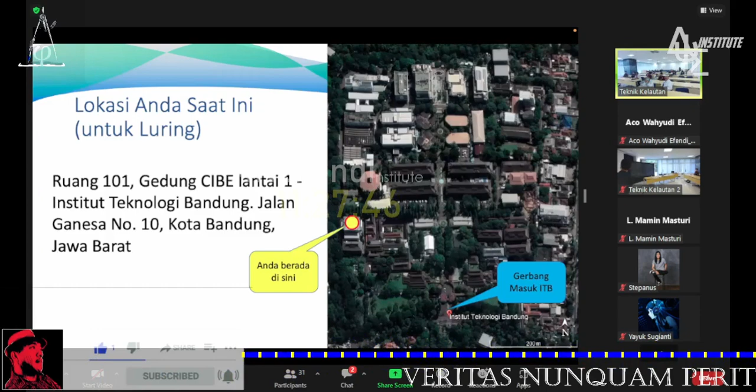Selamat datang untuk semuanya. Untuk para peserta, Anda ada di ruang CIBE kurang lebih, apabila di atas itu ada arah utara, kurang lebih kita ada di posisi barat daya dari area ITB Ganesa. Peringatan juga karena ITB ini berada di lokasi yang dekat gempa, jadi mohon atensinya untuk tindakan terkait dengan gempa.

Jika terjadi gempa bumi, pertama mohon tenang dan jangan panik. Kedua, berlindung di bawah meja atau segitiga kehidupan yang melindungi kepala. Ketiga, jangan berlindung di dekat mesin, kaca, lemari, atau rak material dan produk. Keempat, temukan jalan keluar dan segera meninggalkan gedung saat gempa terjadi. Kelima, jangan menggunakan lift saat terjadi gempa bumi. Dan keenam, berkumpul di assembly point yang telah ditentukan.

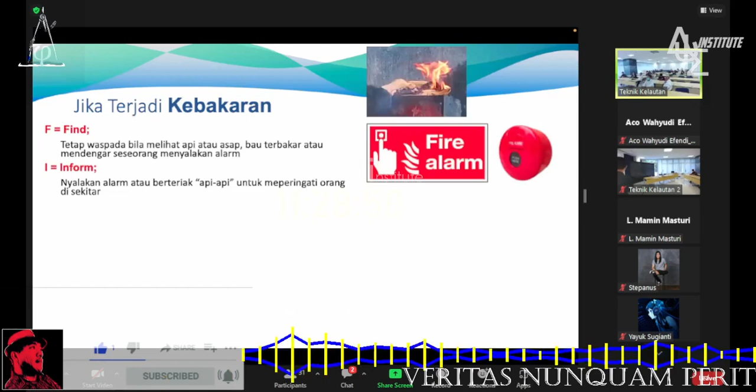Jika terjadi kebakaran, beritahukan kepada orang-orang di sekitar apabila ada bahan-bahan api yang mulai memercik. Selanjutnya, jika mampu, mulai cegah agar api itu tidak menyebar. Ada APAR di luar yang mungkin bisa digunakan apabila aman untuk dilakukan, apabila tidak aman segera menuju ke assembly point atau titik evakuasi.

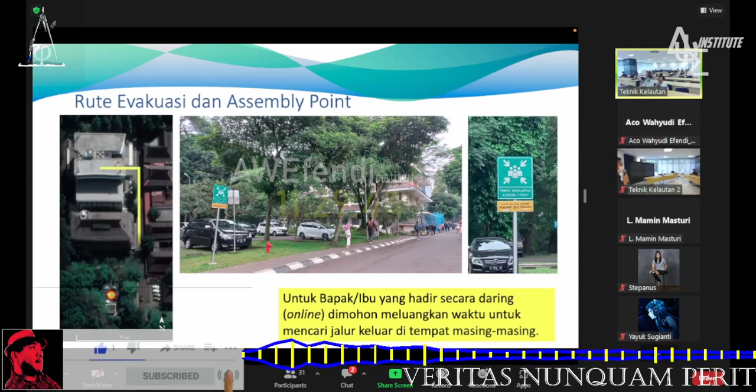Di sebelah selatan itu yang terdekat ada assembly point di titik tersebut. Bapak Ibu bisa keluar langsung dari pintu utama langsung menuju ke arah kanan. Untuk yang hadir secara daring atau online, silakan menyesuaikan di rute evakuasi terdekat. Sekian, terima kasih Pak.

Apabila ada barang jatuh Pak dan tidak ada meja, mungkin bisa bersandar, tapi yang sekiranya itu tidak langsung menuju kepala. Jadi seperti ini ada daerah plafon gitu. Begitu Pak. Terima kasih.

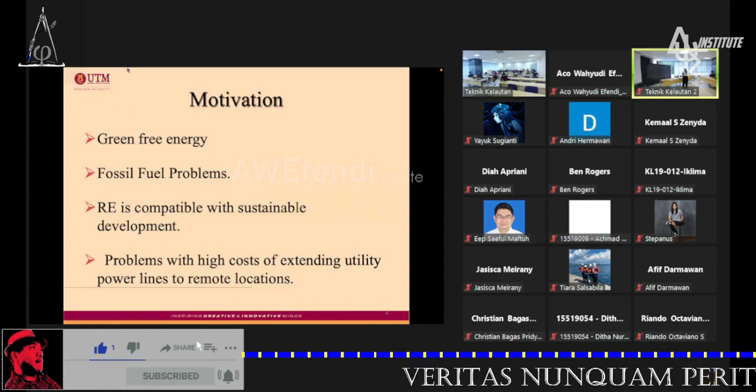Especially like the river, the activity of people in a remote village in the jungle with access only to the river. This is basically an overview of the different energy sources that we can use.

Sun, solar—so there are different possibilities for filling the energy need. But for this presentation, I just focus on the turbine, the tidal current turbine.

So we can have energy, that's great, but the only problem is that in Malaysia the wave is small, you know. So we still have to do some kind of design on how to capture it.

In my presentation, I'll focus more on the tidal current; offshore wind is already a well-established technology.

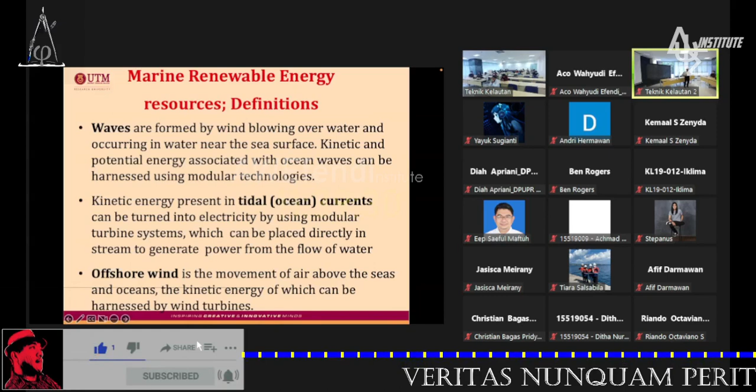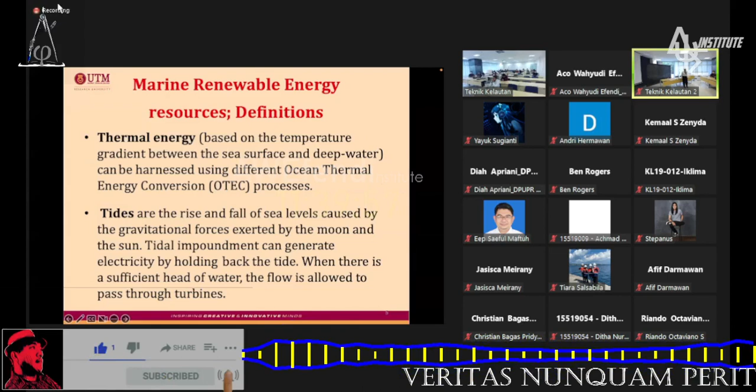So thermal energy, you know, that's always there—tidal range, or osmotic pressure. There are different scales for it, marine biomass using seaweed and so on. A lot of alternatives.

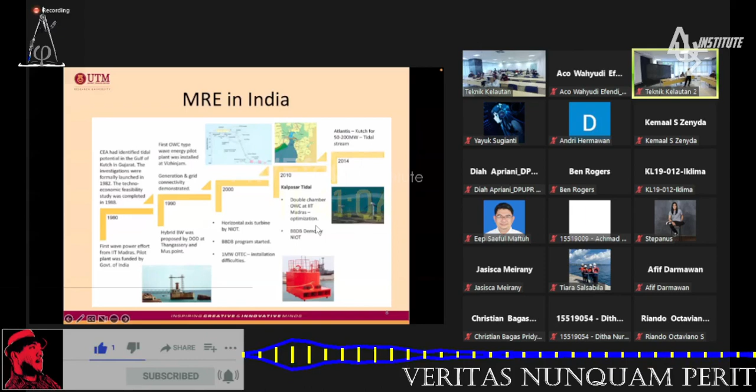Okay, so this is from India, using tidal current.

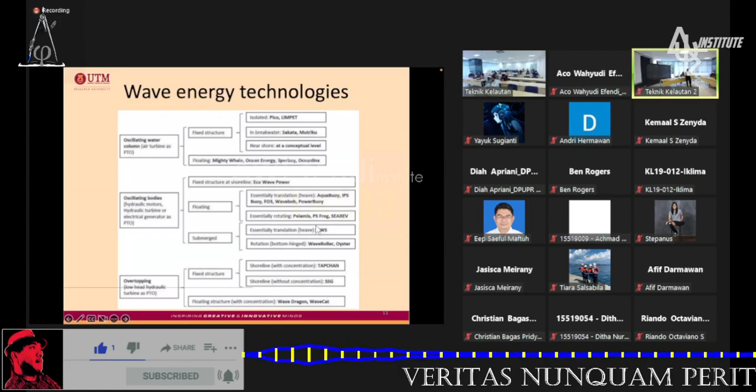So you can see, for example in the wave channel, you have it working with the current. So it means that if we can design a device that can oscillate, then we can tap into the energy.

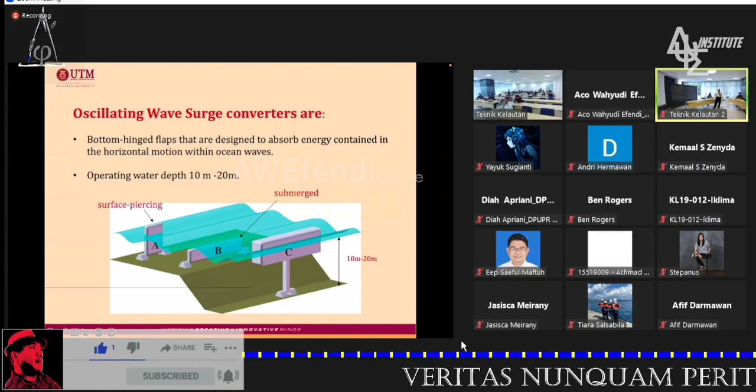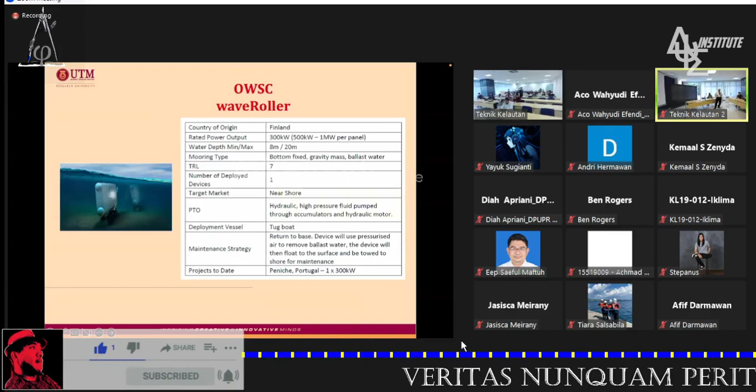So there's a lot of these devices. This is one of them, using the flap—the wave roller. Okay, next one.

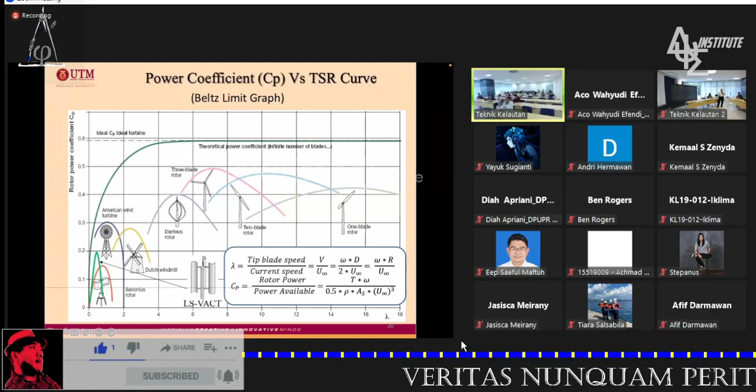Okay. And you can see that nowadays the current turbine seems to be in the commercial scale already. Okay, these are the different current turbines, and mostly you see most of them are propeller type. That means they need significant current speed to be able to be commercially viable. Usually it should be about 2 meters per second. Okay.

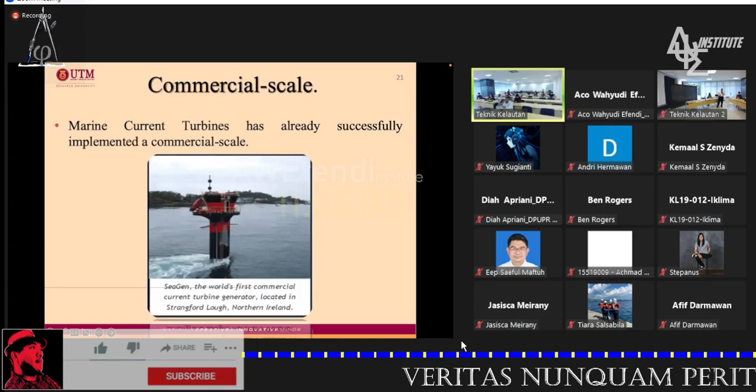So we are now focused more on the hydrokinetic turbine. So there are basically two types: the axial flow and the cross flow. The axial flow is basically for the horizontal axis turbine using the propeller. And for our case, for the low speed one, usually using the vertical axis current turbine or the cross flow type. So you can see all these types of turbine. Last time I saw Indonesia used the Gorlov turbine.

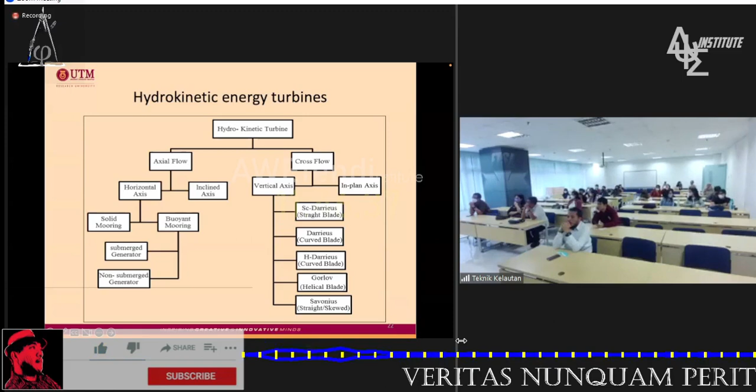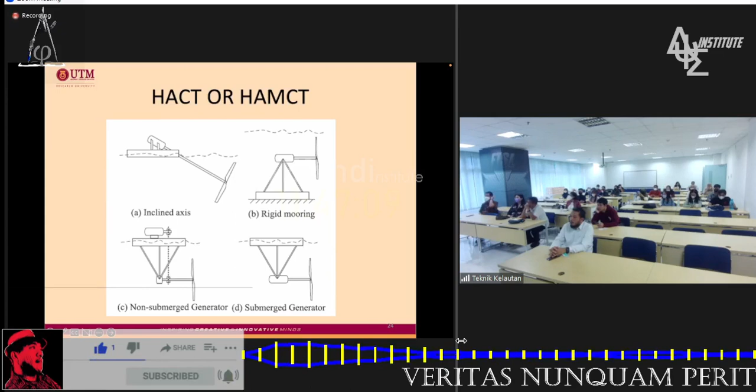Okay, next. So this is the picture of the different vertical axis current turbines we focus on this morning. So we have this Savonius, Gorlov, Darrieus, H-Darrieus. Okay. So this is the horizontal one, which we are not focusing on today because they're mostly using propellers. This is more for higher current speed. Next.

But since the current is very low, we have a problem with the torque. The torque is needed to turn the generator. So it's better to start off with a higher torque, and then you put the gearing to increase the speed. Because at the end of the day, you need to turn the generator. No point to have the blade turn very fast if it doesn't have enough torque. You wouldn't be able to turn the generator. So that's the idea that we have. So it's like a cross between Savonius and Gorlov.

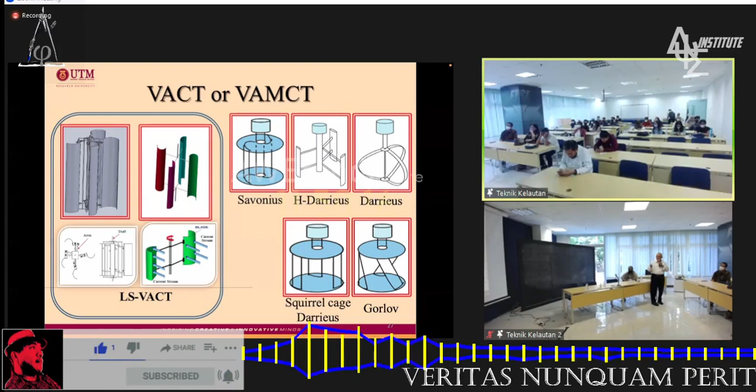So with this type of blade, the angle can change. Say this one, the blade will open to get the drag. Okay, and then it's joined using a link. There's a link here so that when the blade opens, this one closes. But the disadvantage of this type of blade is that it's hard to implement. So now our initial try, we just use the simple one.

Okay. What's the objective of this project? The first objective is to build and evaluate a small prototype marine current electric system for low current regions and also for rural areas. Rural areas find it very hard to get the power. And then also to develop a simulation program to basically check the size of turbine that is suitable that we can build. Okay.

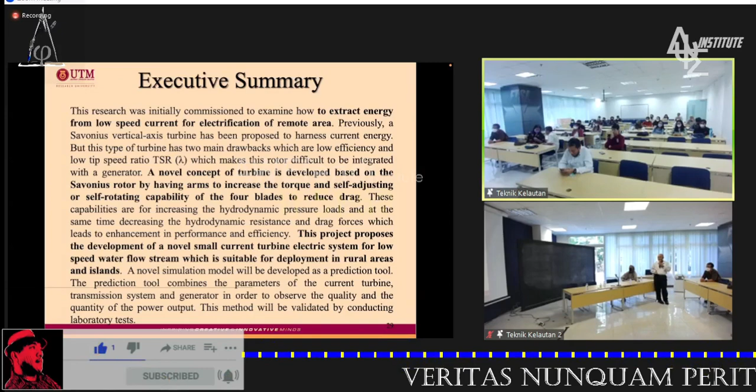So this is basically the summary of this project. Firstly, to extract energy from those low currents, and also for the electrification of remote areas. And then we want to come up with some sort of novel concept of turbine, developed based on Savonius, because it's very low speed current, and try to improve on this Savonius type of turbine. Okay, next.

So this is the background that shows that Malaysia does have a national green technology policy. We need to have this policy so that our proposal will be supported by the government. And then we have our Malaysian plan.

This is one part of our national plan. And in Malaysia, ocean energy can be a resource for green marine renewable energy, because Malaysia is well covered by the ocean. We have a very long coastline, so naturally we want to utilize this marine renewable energy. Marine current turbines have already been successfully implemented, so these are now a proven concept. We only need to apply it in our own area.

Okay. So when we say rural area, the first thing we have to know is how much energy is demanded from this rural area. So this is the basic requirement nowadays: lamp, desktop, the like, the basic electrical requirement for the rural area. We come up with a figure of say 4,450 watt-hours for one particular household. So we said, okay, let's design it.

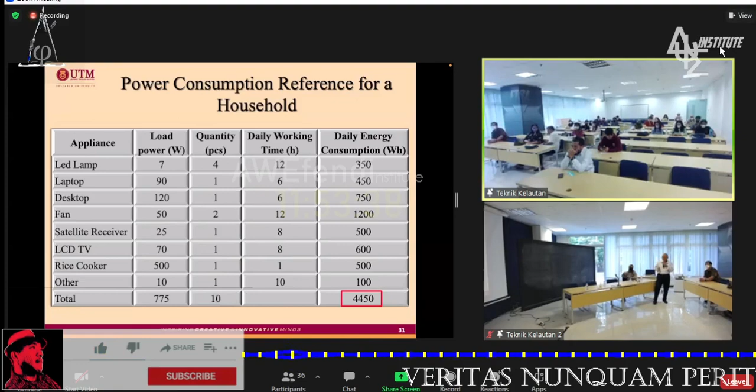Okay, next. So before we start to design or build the turbine, we use the MATLAB simulation program. The MATLAB simulation program is like a virtual renewable energy device. From there we can put a virtual turbine, a virtual generator, using the permanent magnet. This is the pulley type to change the torque to velocity. So this is basically the schematic of the program, Simulink.

Okay, next. So when we use Simulink, we figure out that we need a turbine that can operate at 1 meter per second. This is the rotational speed of the turbine. And then there is some value of the torque, and this is the power that can be generated. And this is the amount of energy we figure we can generate per day, which corresponds to the requirement of one household. Okay.

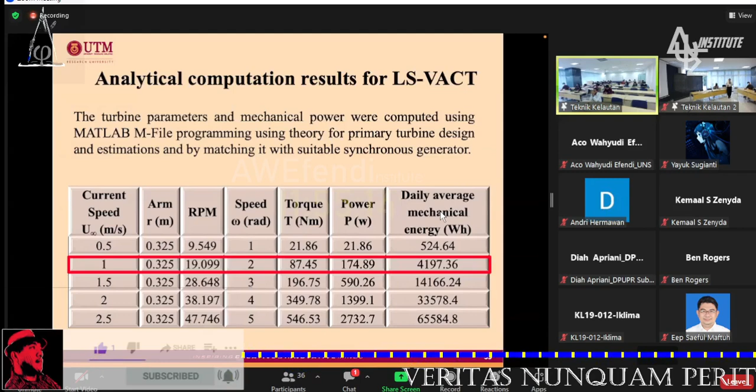So then we start to design the turbine. Since it needs to be floated near the surface, it has to have a buoy. Inside the buoy, you have the pulley system and the generator. So its function is just to float the turbine, and it also has space to put the generator and the pulley. So basically, this is the shape of the turbine.

And we have an extra bit here, which we didn't really implement. It is just to improve the flow to the blade. Only half of the turbine works. The other half is actually going against the current. So we need to block this one so that we can reduce the drag, to divert the flow from this side to the other side. That logically improves the performance of the turbine.

So the size is about 1 meter high, radius about 0.6. Draft is expected about half a meter, plus freeboard. It's made of fiberglass, with stainless steel for the mechanical parts, and all together it's about half a ton. The idea is that it can be carried by about 4 persons. Because it's a rural area, it must be transportable by people, so the size has to be right, and you have to have enough energy retrieved from the environment.

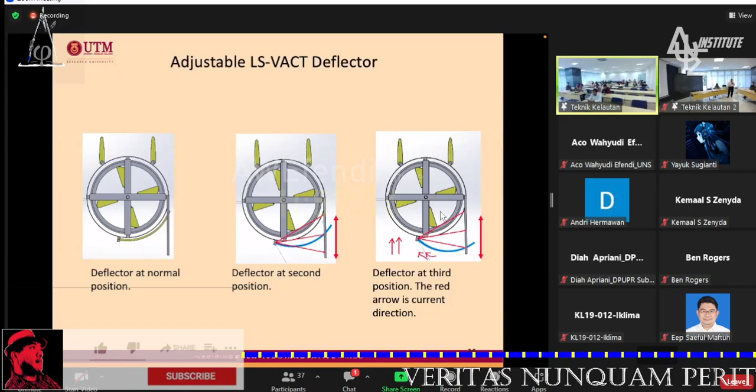This is the actual construction of the turbine. This is to show how big it is compared to one person. The buoy. Okay.

And then what we need to check is especially the power coefficient. That means we have to know how much torque it can produce and at what speed. So we put it in our towing tank. Fortunately we have a long towing tank, 120 meters long, 4 meters wide, 2.5 meters deep. We put the turbine model in and tow it in the towing tank to simulate the current flow. As we tow it, the turbine starts to turn.

So these are some of the features you have to incorporate to get the parameters we want. We have a pulley, a wire, and then we put on some loading. Because this turbine, once it's loaded, we have the load against the speed of the turbine.

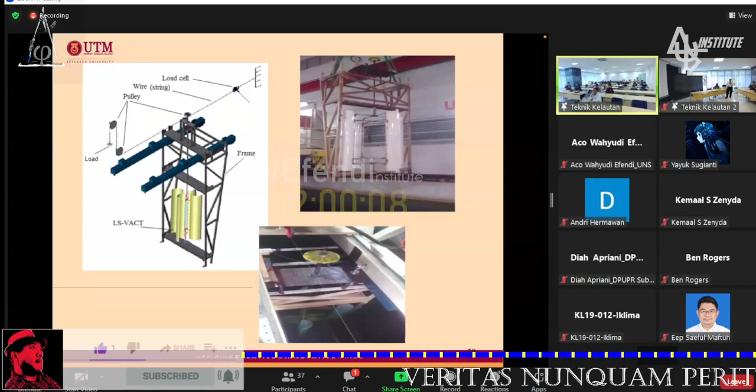Okay. Next. Same, is it? Very simple.

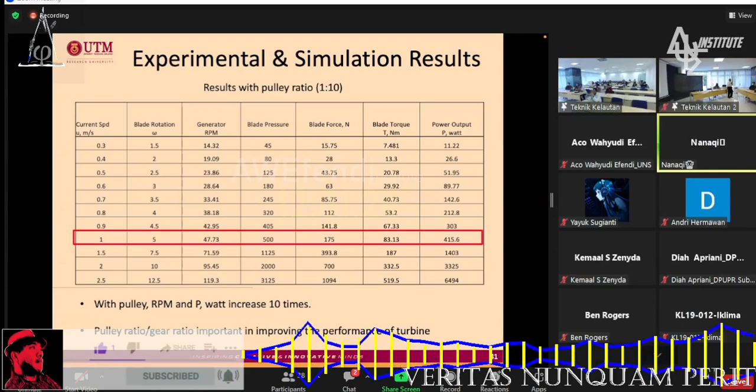Okay. So from the experiment and simulation, we come up to this figure. So I think, okay, we can still achieve it. You can validate the simulation result. So we figure out, yes, we can still achieve some power output that we require.

Okay. So the next thing, once we have the construction, we have to put it actually on the site. So this is a site near the tip end of Johor. So this is the most southern tip of the Asian continent. So this is an area where there is some fishing activity, where you have the fish farm. So the problem with this fish farm, they cannot get the main grid. So they basically have to use a generator to get electricity.

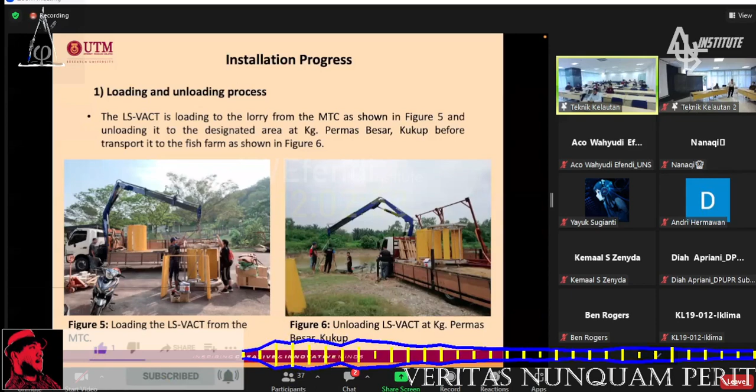Okay. So you have a lorry to pick this up and you have to transport it on site. So you see that the size and weight of the turbine have to be considered, because there's not much facility that you can rely on. Just from the lorry, we put it down, and after that, you have to use human power to transfer. Okay, next slide. Yes, so we have to have a sort of platform, a floater, so that we can put the turbine on the floater and transport it to the fish farm.

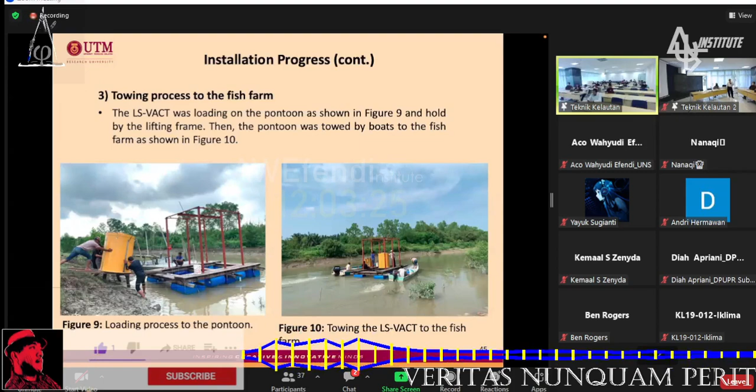So this is now the turbine on site, the floater platform, by the fish farm. And also we have the device to lower and lift the turbine up. We have some constructed.

So these are my PhD students from India. This is my colleague, an electrical lecturer. He owns the farm. I was lucky to know him.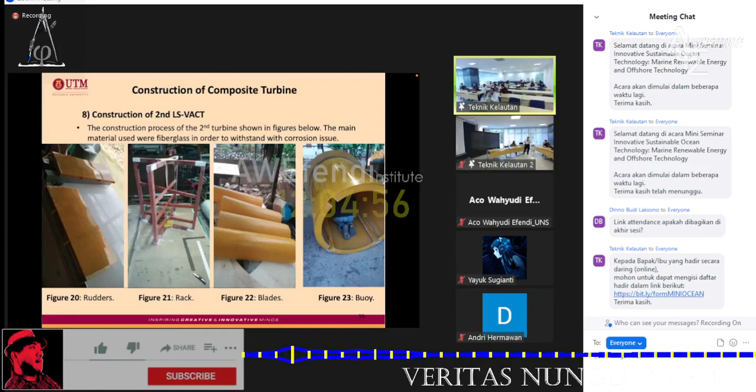So this was our surprise when operating the turbine. Just a few days in, we found that there were a lot of barnacles and corrosion. So the next thing is we make another turbine. Fortunately, we have somebody to make a turbine made of composite. So now we change the material to composite. This is the composite buoy. It's the same shape, just made of composite.

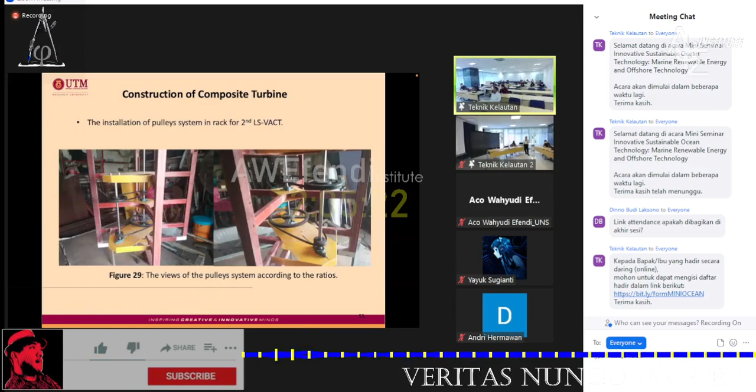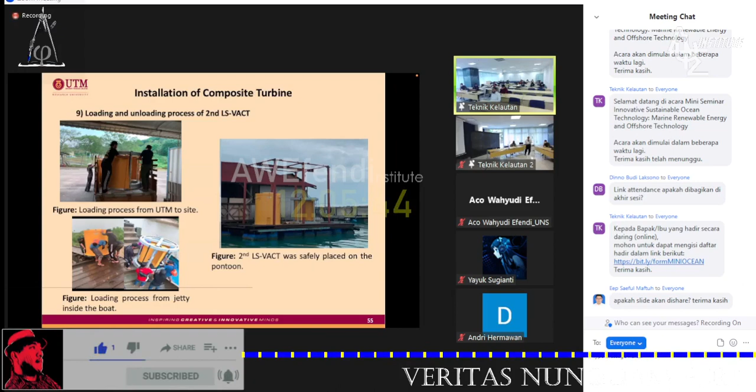Okay, next. So now we can use this composite one, but still we have a problem with barnacles. Barnacles are still there. So we may need a special coating to avoid the barnacles. Next. This is the complete construction of the buoy. No metal parts, all are composite. So we install it again to get the data. This is again the same process that we have to do. The next one. So this is the result we get.

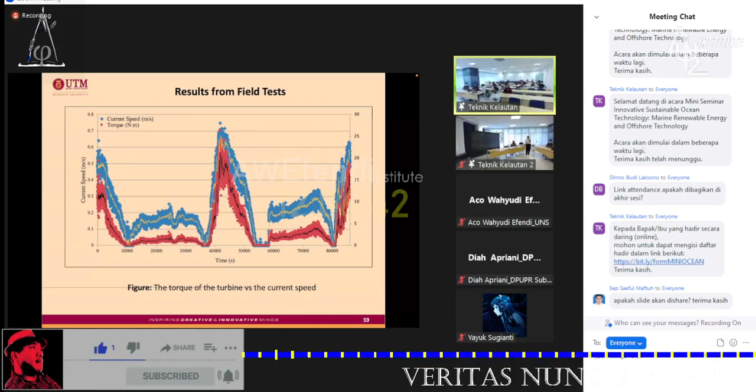Again, the power and the RPM. Basically the same idea, right? Goes with the RPM as well. Higher RPM means higher torque, higher power.

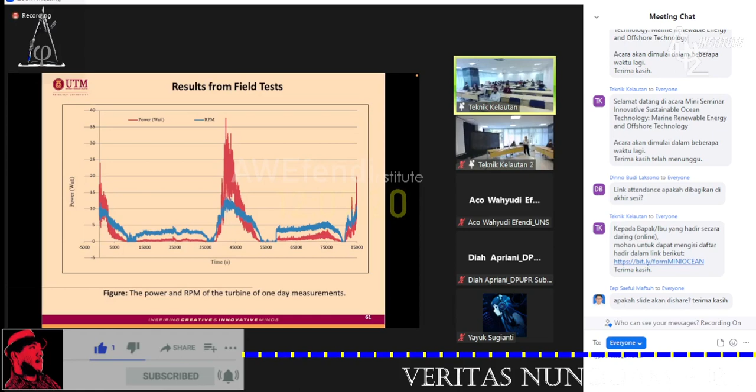Next one. So again we go back to the simulating. Simulating programs are quite handy. So we just add in the solar, estimate the power that can be derived from the solar, and add it to the power from the turbine. Okay. So I have a master student that studied this. We bought one solar panel and then we tested the power that we can get based on the sunlight, because it depends very strongly on the sunlight.

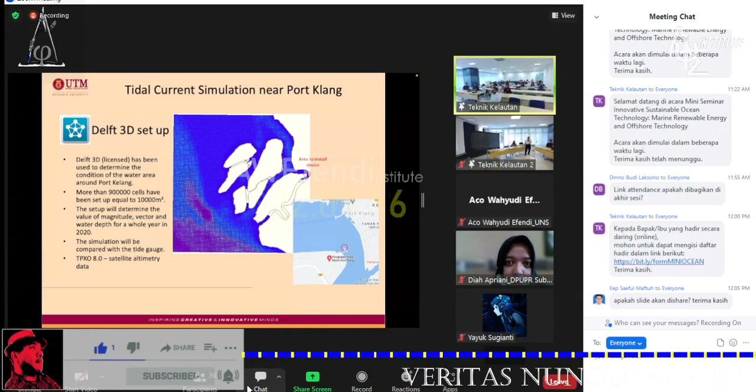And also another problem we had is I don't think we can go back to the same activity. Civil engineers' software to estimate the current speed around some location. So we know there's a location near Kuala Lumpur, the Klang area. They say that this area has a better current speed. So we just simulated the current speed with this 3D software. Got some friends from the civil engineers to help us.

So that means as a naval architect now I can say, oh, the civil engineers, good to have friends from the civil engineering discipline as well. Okay, so the next one.

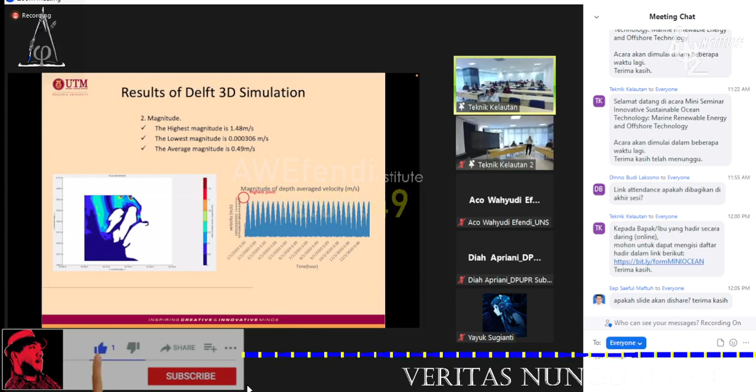So this is the velocity that we get from that area. Basically, we got a highest velocity of 1.48 meter per second, the lowest about 0. So the average is about 0.5, much better than the previous one, but not as good as we expected.

So if you combine this, you tend to have a better capture of the energy, hybridizing the current turbine. Okay. With MATLAB, we found that if you have 2 current turbines and 3 solar panels, you should be able to achieve the power that you need within a 15-day cycle. Every 15 days they do this cycle, because the tide changes twice a month. So that's what we can propose: if you were to use this vertical axis current turbine, you need to hybridize it with 3 solar panels.

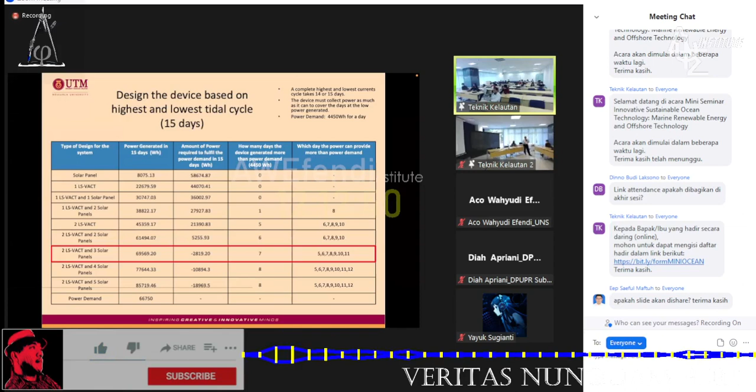Then you make it very cheap. But it depends. Maybe Indonesia can do it. You have many times our population. You can do the mass production of this system.

Okay, thank you very much for that. Any questions?

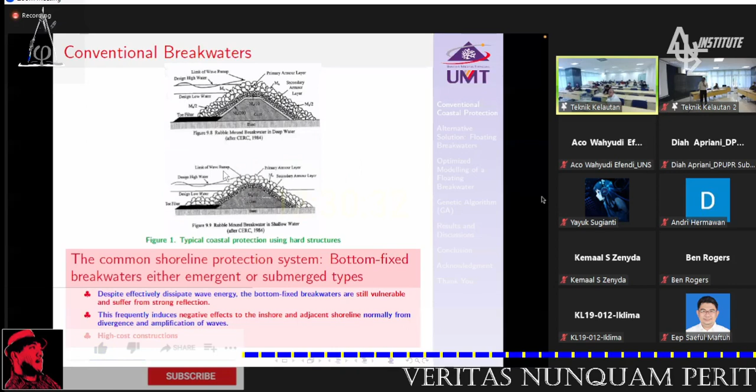And then we can see here, if we build the breakwater, accretion and erosion slightly happen. You can see that on the other side of the fixed breakwater, significant erosion happens, while on the other side accretion and scouring happen.

Okay, and this actually happened near our campus at University of Terengganu. You can see here, the street was actually eroded by the sea wave. In this area, Kuala Terengganu, for about almost 100 meters from the original coastline before we built the fixed breakwater.

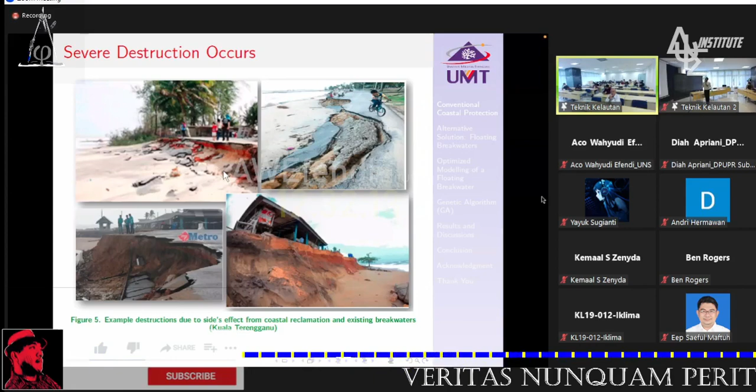This happened because we extended the airport in our area, and due to the construction, we tried to extend the landing way of the airport, which gave a side effect nearby, causing the problem. So regarding the floating breakwater, this is why we propose it.

In terms of economy, we can reduce the cost because about 2/3 of the wave energy, the dominant wave energy, actually happens at the surface, about maybe 2/3 of the depth. So if we build up the fixed breakwater, we should extend until the seabed, and also this is not cost effective. By the protected waters, we need to protect the dominant area of the wave energy.

We try to increase the wave dissipation energy, and we try to reduce the wave transmission. Also, at the same time, we can reduce the wave reflection from the floating breakwater.

I think there are several types of floating breakwaters. I think you already know about this, the structure, the civil structures.

Regarding the numerous floating breakwaters, there is an unsatisfactory wave attenuating effect of the floating breakwater, especially regarding performance in long waves.

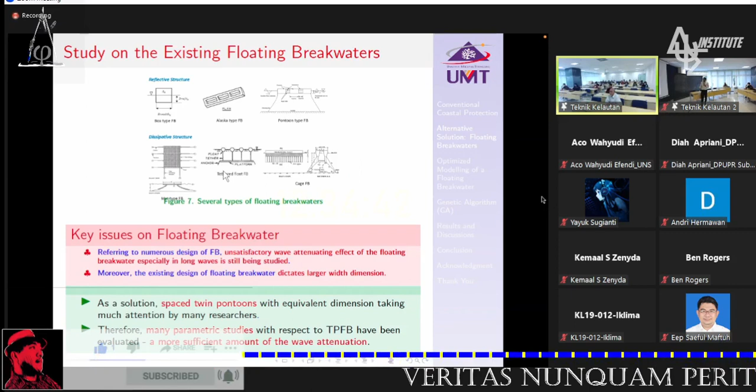So actually this is the latest design. This is actually being constructed in China. And from that model we would like to have extended, finding more about the floating breakwater.

Okay, so regarding the configuration here, our twin pontoon floating breakwater: first we would like to optimize the width, also the draft, and also the porosity.

And then the purpose, the main objective: we try to minimize the KT and KR, and we try to maximize the value of the KD.

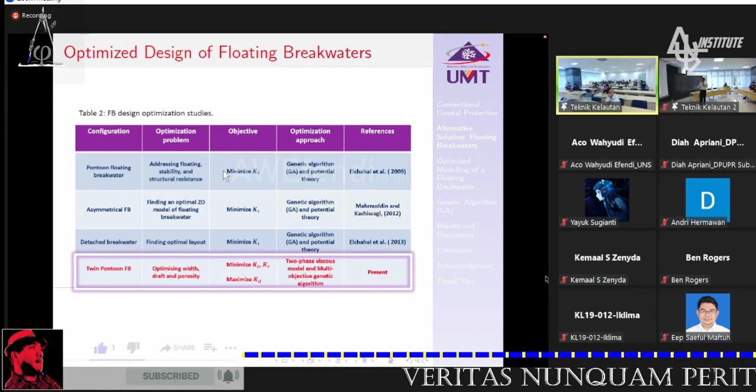Actually, this is our design of the pontoons. So you can see here, this is the pontoon, and the pontoon has a spatial distance and is connected with connectors here. And below the pontoon, we install the mesh cage or fish cage. We also take into consideration the fish cage here.

So what we would like to do with these floating breakwaters, this is like the research gap from the existing floating breakwater. We would like to arrange the distance between these two pontoons, because these two pontoons actually give a significant effect to the value of KT.

What we found in this research is a reduction of about 8 to 12% in the wave transmission coefficient. Okay, that's it.

At the same time, we have also simulated to optimize this distance and also to optimize the value of the draft ratio, using the genetic algorithm.

I think actually it's very basic, this tool, if applied in mechanical or electrical engineering, but it's still rarely applied to coastal protection. So why did we use AI, artificial intelligence? Actually it's very powerful to find the optimum one, because it's very effective.

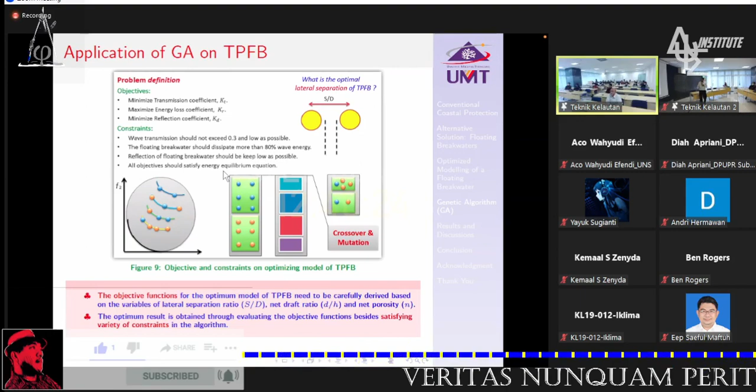This is the procedure of how to conduct the optimization for our study.

This project is supported by the Ministry of Science and Technology Malaysia, for about 900,000 ringgit, maybe equivalent to 3.15 million rupiah, or billion rupiah.

Our focus is on this in the red box. This is just doing the optimization, and then continuing finding and so on. So this is looping - if still not finding the optimum one, this will re-simulate again.

One point that's more interesting in our optimization is that it's not purely theoretical, because sometimes the candidate of the optimum design we get from MATLAB is not fully proven when we evaluate it with CFD. So we have, if we already have the ranking of the candidates, the best candidate maybe from 4,000 candidates, we just list down maybe about 10 candidates.

So we try to do the ranking and examine each one by one. From the 10, maybe only 2 are proven, maybe only 1, because CFD is like a virtual towing tank or virtual flume tank. So far the accuracy is still acceptable compared to the experimental model test in the flume tank.

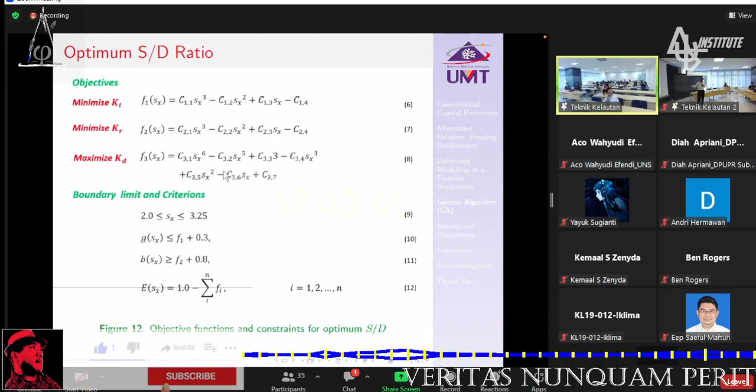This is the boundary limit that we conducted. We try to minimize - the minimum value of the property is 2.0, and the maximum is 3.25, and that is also some constraint that we employ in optimization.

Regarding the depth ratio, how much we get the optimum of d over h, I'm considering the clearance.

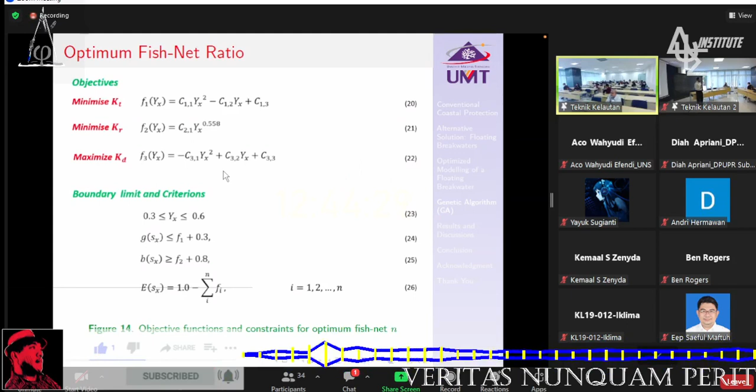You can see here, can you imagine? This is artificial intelligence, or machine learning - currently we call it machine learning - finding the optimum design between these two contours.

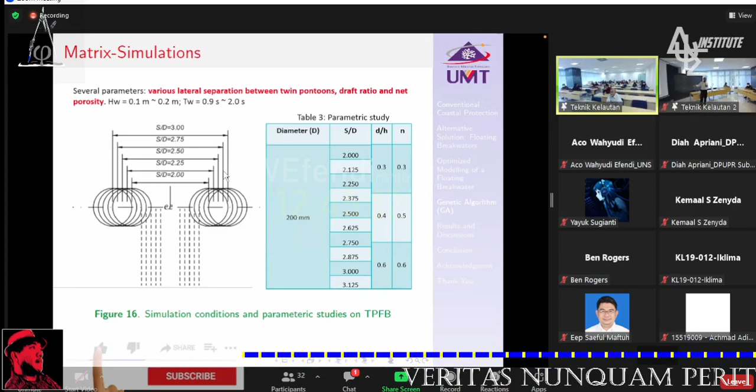This is the parametric study that we conduct, and as I mentioned before, we also operate the simulation of the optimization with the CFD, and here we are employing FLOW-3D. FLOW-3D is a reputable software, especially in civil engineering, because it's also dedicated for hydraulic models.

So this is our setting, and then this we got from the simulation, and we compare with the existing model test published by Ji et al. 2015, and so far our result is getting fairly good agreement with the experimental model test. So from here, we are confident continuing with the optimization later on.

Okay, and then this is the value of the KT regarding the values of the wave length, wave period, and also wave height here. And again, sometimes if we directly conduct the optimization, the modeling directly using the commercial software or CFD, we cannot understand the basic mechanism. Because of that, we also conducted 2D analysis regarding the performance of the porous walls with our own coding.

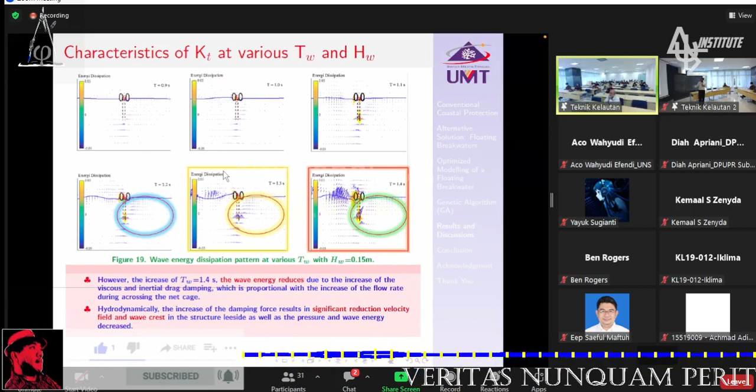Okay, you can see here also regarding the wave height. You can see how much the blue color happens not only at the surface but also near the seabed. So this indicates sometimes scouring or maybe accretion may happen here.

Okay, so this irregular wave we conduct here. And I should mention that our optimization is not single optimization, but multiple objective optimization, because our objectives here are three. The first is reducing the KT, the second is increasing the KD, and the third is reducing the KR. So it's multiple objective, more complex compared to the single optimization problem.

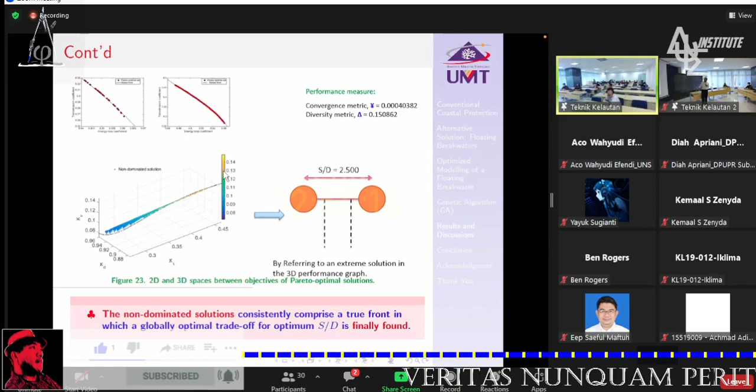Actually, if we plot the values of KT, KR, and KD in the 3D graph, you can see the correlation: reducing the KR goes with reducing the KT, and similarly increasing the KD. Similarly here, the value of the KR regarding the draft ratio and also the porosity. So this is the correlation between the wave coefficients and the physical model of the structure itself.

Okay, so regarding the porosity, we got the value of 0.5567. It's like a tricky number, but after that we tried to evaluate with the CFD and finally improve it. I would like to show you that in the visualization of the CFD itself, regarding the assessment of this population model. Okay, so this is regarding the CFD.

So KT was significantly suppressed to less than 0.3. Our model achieves a significant reduction of the KT, because the current KT is still more than 0.5, but we got 0.3. So it means it's more effective than the current existing model, maybe because that one hasn't conducted the optimization yet, but our KT is getting less than 0.3. As I mentioned in the previous slide, today the KT is still more than 0.5, but we got less here.

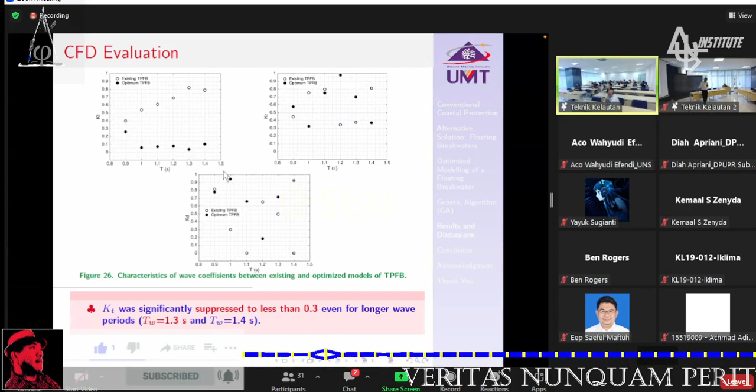Okay, and then regarding the wave energy here, you can see the top one is the existing porous breakwater, and this is the optimum one, and the blue and green is less energy when passing by the porous breakwater. This indicates that the potential erosion can be reduced just by applying this porous breakwater.

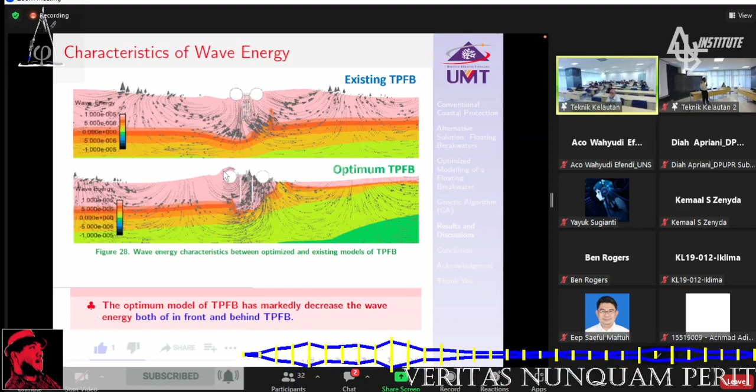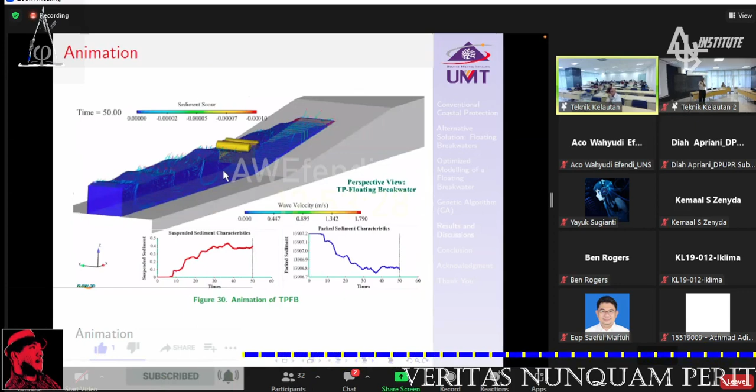Okay, if you want to see the wave energy distribution once the wave passes by the porous breakwater, you can see it at various times. And this is the animation that we have conducted, and we ran this simulation for this case for about 8 days. So today we are running, maybe another 8 days we get the solution. Okay, we can see the video. Yeah, actually, TPFB. Yes.

So this is the wave generator, and this is the porous breakwater, and we simplify the slope near the coastal zone. When passing by, you can see the suspended sediment increasing, and the characteristic will be opposite. This is still theoretical, but in actuality it's also difficult to capture the sediment transport, isn't it? And also the effect on sediment. But maybe by CFD it's easier. Regarding validation, maybe we will do more verification in the next model test.

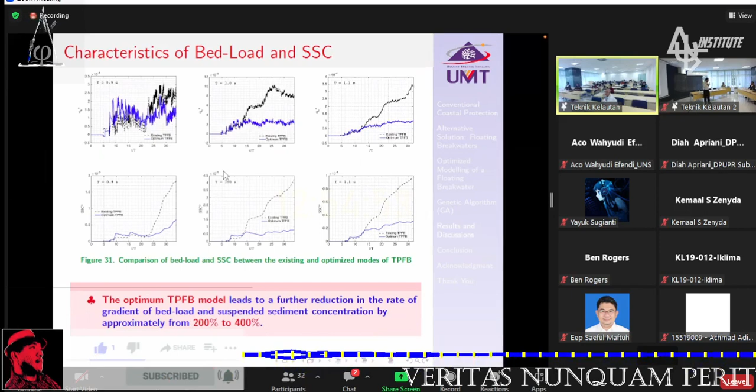Okay, so the bed condition regarding the optimum TPFB model. Here the optimum TPFB model leads to further reduction in the rate of the gradient of the bed-load and suspended sediment concentration by approximately 200 to 400%. So we see the animation from the optimum design. And then the optimum design also leads to reduced sediment transport of about 30% at wave period 1.2 seconds, 10% at 1.3, and 5% at 1.4. Meaning that for long waves, the efficiency of the floating breakwater is also reduced.

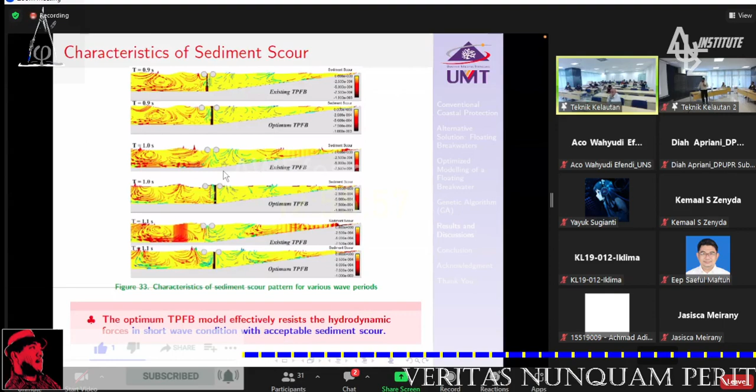Meaning that this porous breakwater is very efficient and effective against the wave energy, and also friendly because it's not a rigid structure, it's a soft structure, because we also try to reduce the reflection phenomenon in front of the breakwater, compared to the fixed one. Okay, this is the conclusion.

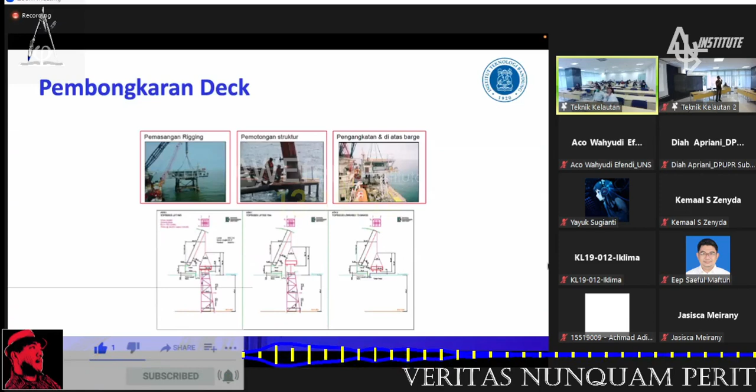Tentunya ada pertimbangan bahwa beberapa equipment di dalamnya itu mungkin diangkat duluan untuk mengurangi berat dari top side-nya waktu lifting. Ini studinya untuk top side.

Pembongkaran jaket biasanya di dalam desain dari platform atau kegiatan oil and gas itu ada conceptual, FEED, dan EPC, construction-nya. Biasanya dilakukan konseptual dulu, ada beberapa alternatif yang harus studi. Dalam konseptual selalu ada minimal 3 alternatif. Dan ketiga itu dilakukan feasibility study-nya, artinya keekonomiannya mana yang paling feasible dari segi technical, ekonomi, dan juga safety.

Nah, di sini mungkin dilakukan studi misalnya dipotong 4 bagian. Ini tentunya ada banyak kegiatan underwater activities untuk pemotongan dan sebagainya. Tetapi di sini jadinya crane yang diperlukan akan lebih kecil. Itu di dalam conceptual study biasanya kita lakukan harganya berapa nih? Crane barge-nya itu ada di mana? Itu kan mempengaruhi biaya transportasi, dan mobilisasi dan demobilisasi.

Kemudian opsi yang lain misalnya yang angkat sekaligus. Ini juga yang kami dapatkan waktu mengerjakan Chevron misalnya untuk detail engineering-nya, yaitu kalau dipotong di bawah, di situ ada mat, sehingga di atasnya sudah ada lumpur-lumpur, dan itu harus ikut terangkat, dan itu cukup mahal.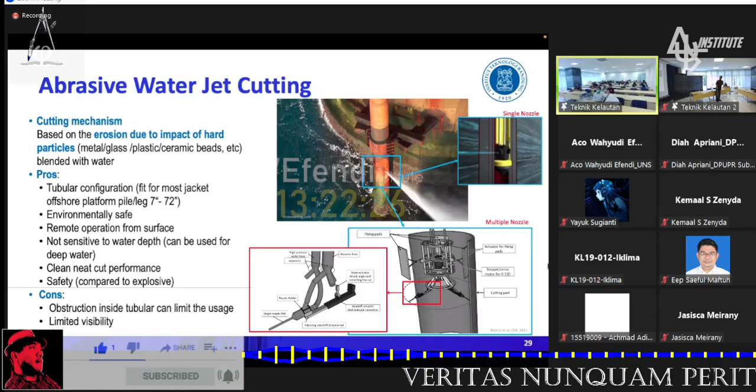Cara pemotongan kalau kami lihat itu memang belum ada teknologi yang lebih baru. Lebih banyak pakai water jet cutting, itu secara environment-nya juga lebih baik. Dan juga bisa dilakukan dari dalam tubular. Itu terutama memang ini baik kalau memang harus dilakukan pemotongan di bawah mat-nya, di bawah lumpur, itu harus dari dalam. Tapi memang akan kesulitan kalau ada obstacle. Jadi pernah kejadian juga kalau untuk motong di bawah mat itu, jaketnya akhirnya digali dulu baru dipotong dari luar. Itu akan lumayan mahal.

Nah, ini dari mahasiswa atau bukan ya, lupa. Jadi dilakukan studi berdasarkan decommissioning dari platform yang ada di California kalau tidak salah. Ini adalah percentage cost-nya. Jadi kalau tadi saya sebutkan Korea memberikan uang $20 juta itu untuk meremove yang sudah dilakukan 2 platform. Saya nggak tahu apakah itu mengcover 2 platform atau ada platform lain, tapi saya belum dengar akan ada yang lain. Jadi saya anggap $20 juta itu adalah untuk membongkar.

Nah, untuk membangunnya itu harganya kira-kira sama, artinya dengan equipment yang baru dan sebagainya.

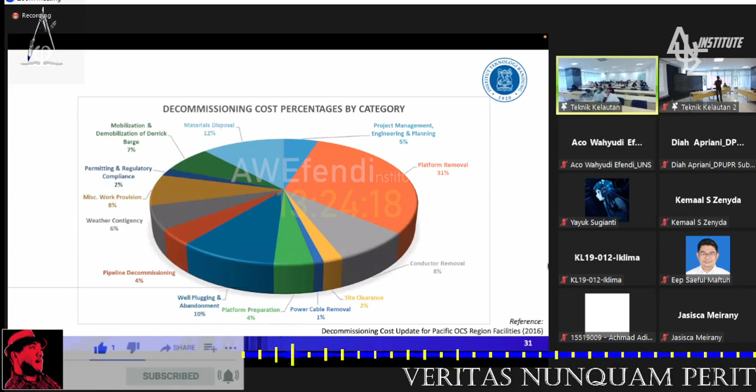Nah, di sini diperlihatkan percentage dari setiap komponen waktu decommissioning, dan misalnya di sini dilihat platform removal-nya sendiri 31%, ada project management dan sebagainya. Dan satu yang menarik perhatian saat itu atau sekarang adalah tentang conductor removal. Conductor removal ini bisa 8% dari $20 juta, sama dengan 1 rumah kira-kira, pikir lebih. Nah, ini satu hal yang secara mudah atau visible untuk dilakukan optimasi.

Jadi konduktor removal yang biasa dilakukan sebelum top side-nya dipotong, dia perlu pijakan. Jadi ini cutting, dan kemarin kalau dulu zaman waktu Chevron, dia harus di bawah 20 feet. Sebetulnya requirement-nya dari 10 feet. Tapi waktu itu diminta 20 feet dulu di-cutting, dengan asumsi kalau terjadi kesalahan dalam pemotongan, bisa dipotong lagi di posisi lebih atasnya.

Jadi abrasif water jetting itu, dalam, dipotong di sini. Setelah dipotong, kemudian cut proof, diangkat biasanya. Diangkat kalau sudah jelas, lalu kemudian dilakukan rencana pemotongan yang lebih lengkap. Nah, biasanya di sini top side-nya belum dibongkar karena dia perlu pijakan waktu.

Misalnya di sini ini masih cut proof. Jadi sebetulnya kalau dipotong sesuai dengan kapasitas barge, biasanya itu 12 meter. Jadi diangkat dulu, dan diberikan pin ini untuk menahan dan dipotong. Dipotong 12 meter, simpan di barge. Kemudian pin ini yang nahan, kemudian diangkat lagi 12 meter, dipotong.